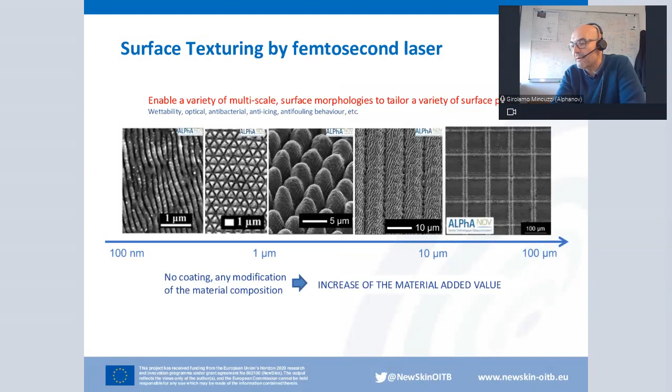In a previous project that has been granted, that we were participating in, named TresClean, we found the way to generate antibacterial surfaces, and we developed this machine that includes a femtosecond laser with very high power, 350 watts, 10 megahertz, and a polygon scanner system that can scan the beam over the surface, and the machine was able to process surfaces as large as more or less 1 square meter.

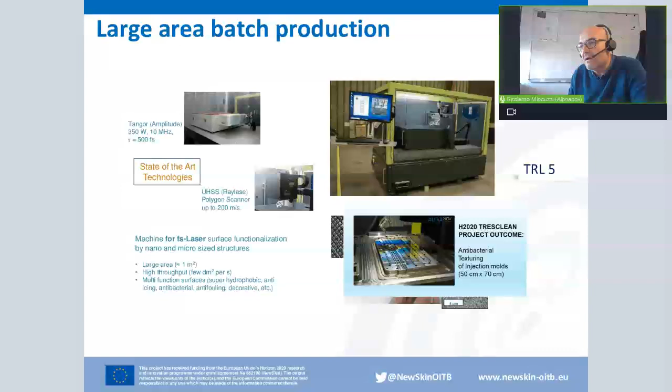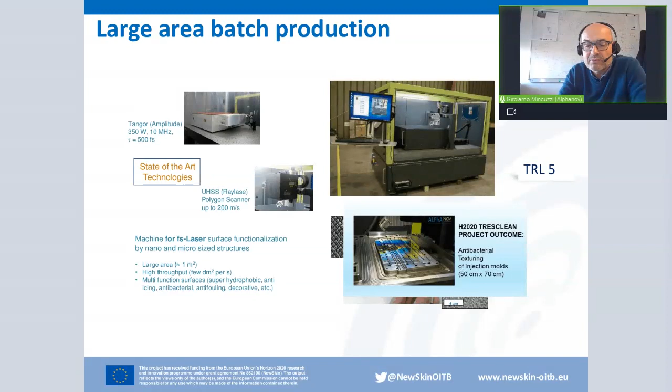The main outcome of the project was the antibacterial texturing of an injection mold that has been used for, let's say, electro appliance applications. But we want to improve, and the target of the project NewSkin for us is really to target mass production.

So to do this, we developed this new machine that you can see here, in which we pass from batch production, so from foil-to-foil production, to a continuous approach through the concept of roll-to-roll processing. So we have the same laser, the same scanner here, but the substrate we process will move under the laser through a roll-to-roll process. I will show you some more details about the machine.

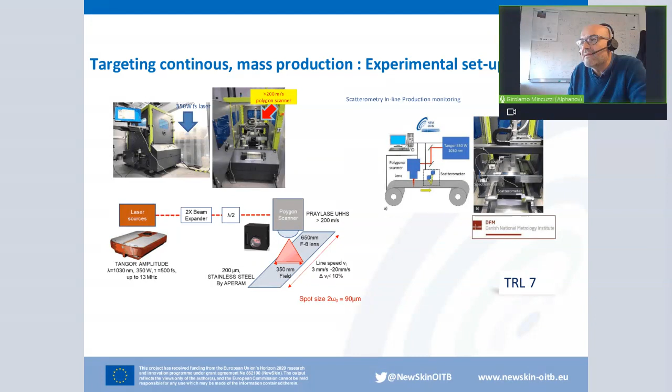The machine includes a system for inline monitoring. The system for inline monitoring is based on diffractometry. So basically, we measure the light diffracted by the regular structures that are generated by laser on the surface, and we compare the spectrum that we obtained with the theoretical spectrum that has been calculated, making a hypothesis on the structures we are generating.

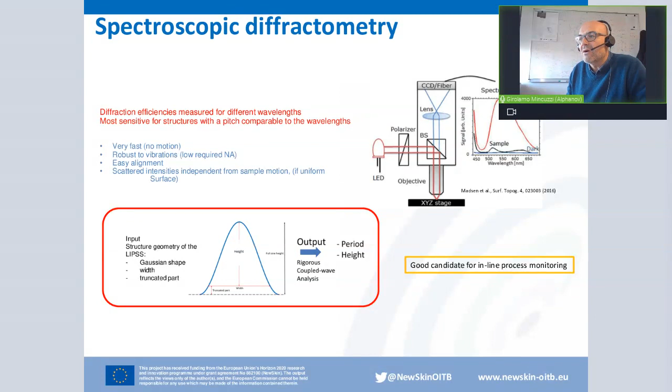So we compare the experimental with the theoretical one, and we choose the one that best fits the experimental results. And this way, we can calculate, for instance, the period and the height of the structure that we have generated on the surface.

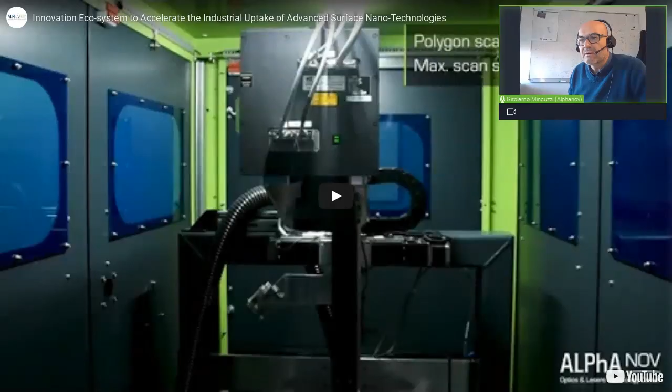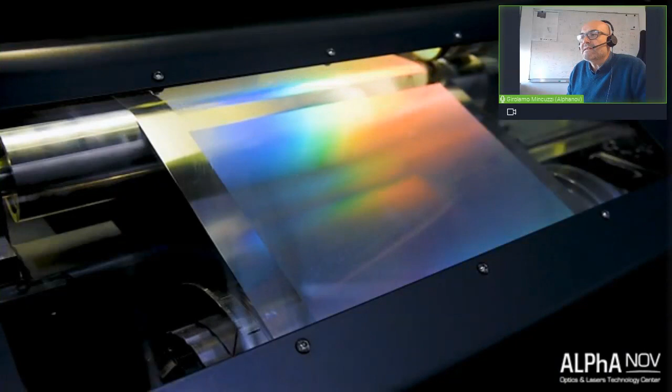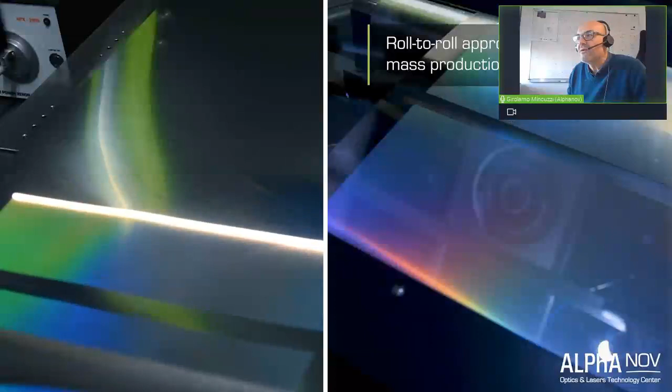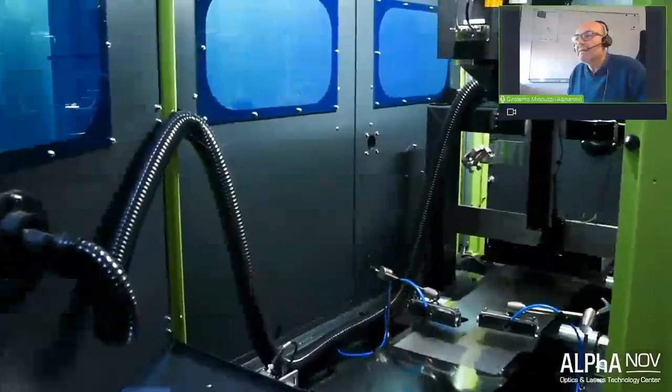Yeah, so here you see the process. The part that has been textured is identified by this dispersive effect, so it's a rainbow color you see. On the left you see the laser, and on the right you see the speed of the process. So it's quite fast. Here you see the laser that we implemented in the machine, and this is the scanner we use, and here you see the inline monitoring system.

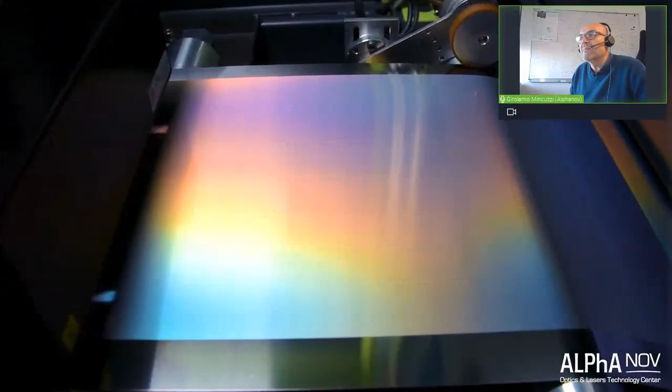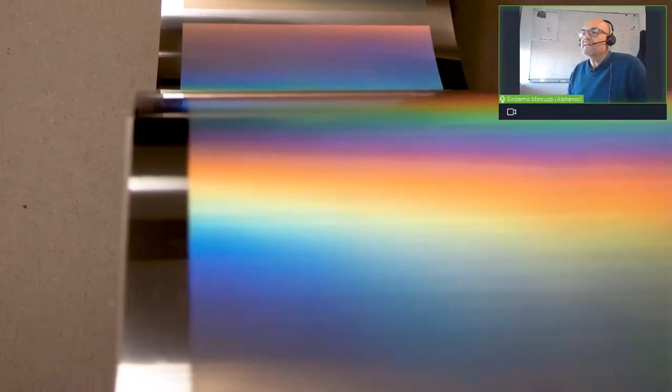So we can reach throughput as high as 5 minutes per square meter, which is very interesting for industrial application. And here you see some of the samples we did. Here are some of my colleagues that participated with me. Yeah. So if I go on, thank you for the video.

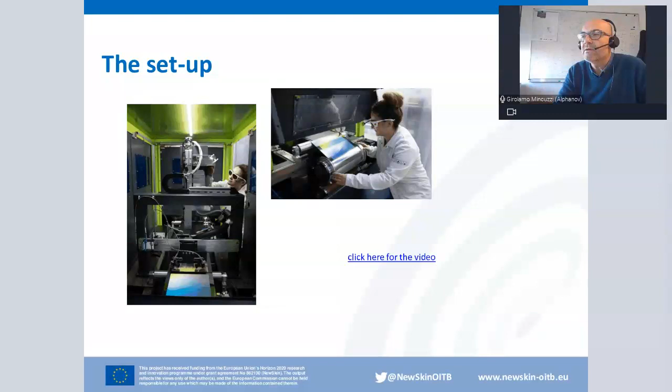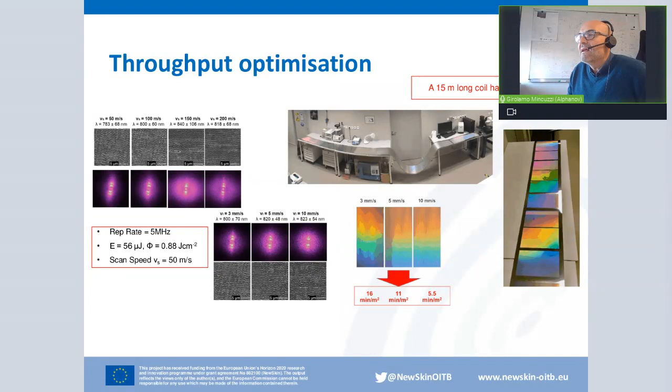Then we fixed the scan speed to 50 meters per second, and we tried to optimize the throughput by increasing the line speed of the coil of material, and we passed from 3 millimeters per second up to 10 millimeters per second, and we found that it's still good at 10 millimeters per second, which corresponds to 5.5 minutes per square meter. Here you see some of the samples. We have been texturing a stainless steel coil that was 15 meters long in nearly 1 hour.

In the meantime, we can measure as well the height, and the height of the structure is around 200-250 nanometers. So the period that I previously showed is around 1 micron, a little bit less; both are consistent with the literature, and it's possible to see if the direction of the structure changes through an analysis of the polarization. I would like to add that given the height of the structure, it's possible to deposit on top of our structures some nano coating to, let's say, enable multifunctional surfaces.

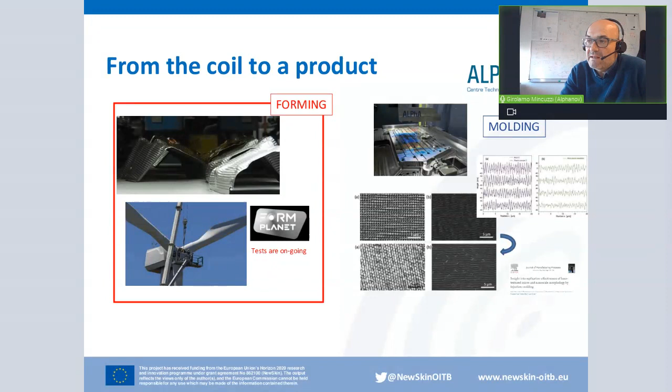So I showed you the machine. I showed you the surface structures we can have. I want to give you highlights on the different properties that can be developed and that are the objects of the value propositions. So if you want to develop one of these properties, for instance, you can apply for the value proposition and we can develop it together.

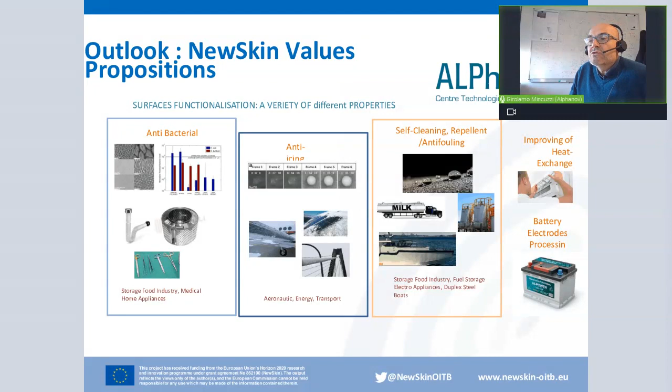So the first is antibacterial. We observed that the structures we are able to generate reduce the proliferation of bacteria on the surface. We evaluated a factor of 10 to the power 3, so a factor of 1000, which is very important. So textured surfaces reduce the proliferation of bacteria by a factor of 1000.

Another interesting property, which could be good for several applications like aeronautics, energy, or transport, is the generation of surfaces which show anti-icing properties. So we can generate on the surface some specific structures, and the resulting surfaces can show anti-icing behavior, or we can improve the anti-fouling behavior of the surface. This is for storage, the food industry, fuel storage, electro appliances, or boat fabrication.

And finally, I will cite as well improving heat exchange, or we can process battery electrodes, both, let's say, current collectors or active parts.

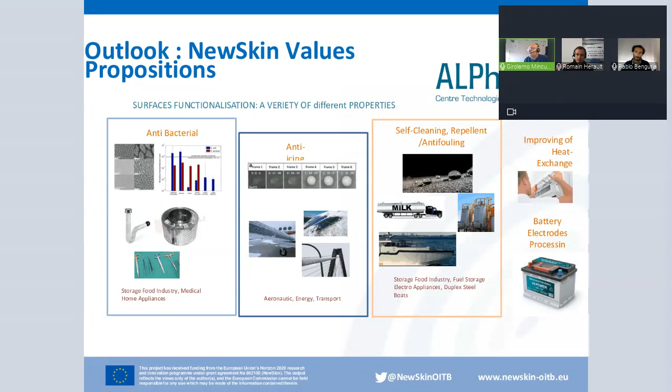Yes, let's say that for the moment we can process metals, first of all. Let's say coils of metal which are not thick, around 200 microns, more or less. This is because the machine can process only material which is not too thick, in particular for metal. Otherwise, it will not be able to do the roll-to-roll processing. But we can try with polymers as well. This could be another option.

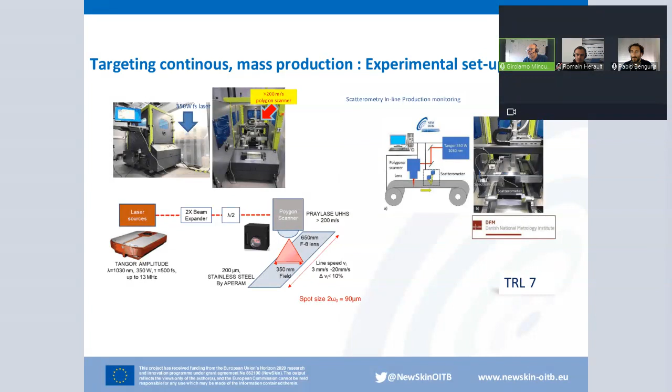For instance, the coil that you have seen in the video is stainless steel. The width is 35 centimeters, and the thickness is 200 microns. So these kinds of materials are largely compatible with the machine that we have up to now. So really, we can make a kind of proof of concept and show the potential of the process. But if you are targeting material which is much thicker, then you have to develop the machine for your industry yourself, let's say.

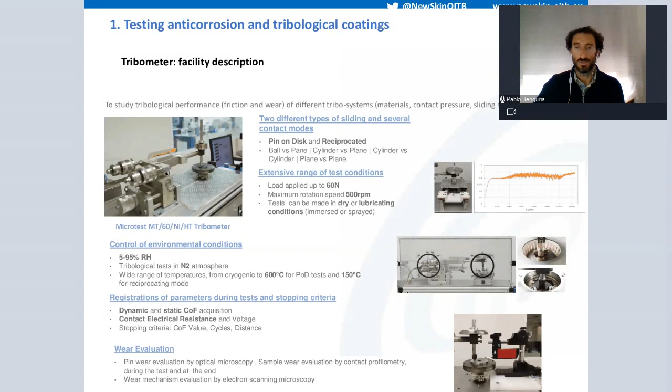In the next slide, I will show you very briefly an example of a selection of substrates that we performed in a private project. We had a given surface coating that has to work in a harmonic drive gear for the aeronautic industry, and they wanted to select which steel substrate would better withstand the conditions during working. So we selected the best conditions, and we achieved an improvement from hundreds of operations to more than 17,000 operations, by applying the lubricant and selecting the best substrate.

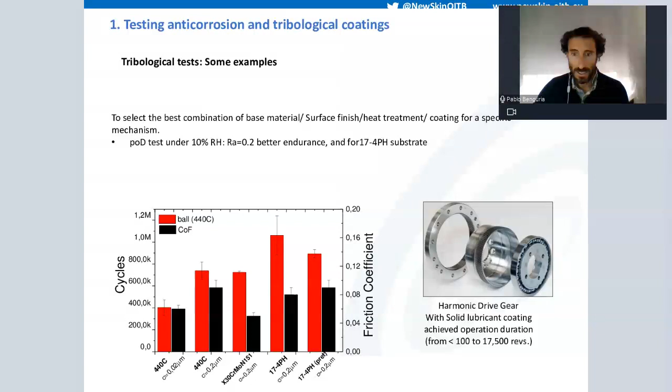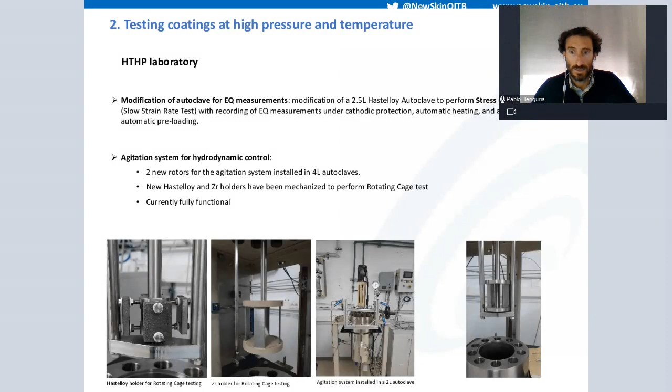Okay, next one is testing coatings at high pressure and temperature. Here we have an autoclave laboratory where we can work under very high temperatures and very high pressures. Here we select as well the conditions and the media that happen in real life. We modified a couple of autoclaves in the project for electrochemical measurements and for the implementation of an agitation system for hydrodynamic control. That way we can perform rotating cage testing, which is quite demanded by our customers. Here you have some pictures of the holders, and here are the samples that are rotating. This was supposed to be a video, but it cannot be played right now. It can be seen how the samples are rotating and then are introduced in the autoclave. And then when it's closed, we can test the conditions that we have defined.

Okay, next one is an example, the same as before. We had to select between two materials, P110 and L80, in a distilled water media under a temperature of 70 degrees and a high pressure of 220 bars, with agitation during almost 500 hours. We performed the testing, and we observed that the general corrosion rate and the localized corrosion were quite higher in the first of the materials. So we concluded that the second material withstands much better the conditions that the customer needed.

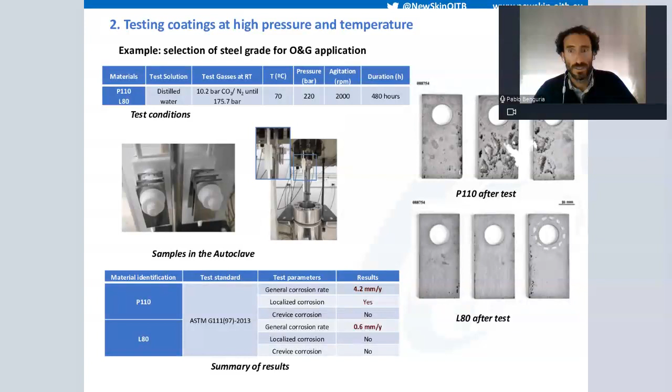Okay, the last one is testing anti-corrosion and anti-fouling solutions in real offshore conditions. Here we have the HarshLab. It is the first offshore floating laboratory for the evaluation of materials and components in a real offshore environment. This is quite new. We had been testing a previous version of HarshLab for 3 years now, as I will explain later.

Now this is the second version, which is in the port of Bilbao right now, but will be carried to the BiMEP area in the following weeks. This is the place where the first version had been for 3 years, and where this second one will be moved in the next few weeks. It's an experimental area in front of the Basque Coast in Armintza.

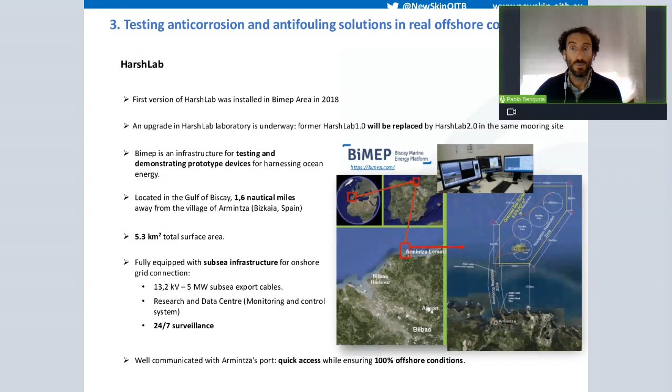It's quite interesting. It was designed for testing and demonstrating prototype devices for energy harvesting. However, the facilities were ideal for us for placing our HarshLab there, because it has surveillance and is quite close to the port, while being absolutely open to the storms and swells coming from the northwest in the Atlantic. And we also have a submarine cable that can provide electric power to the laboratory.

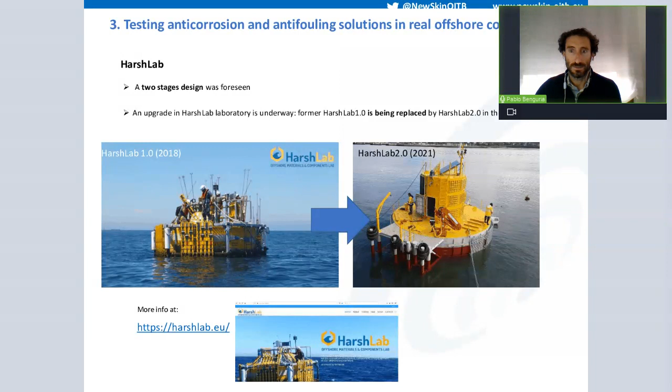So, as I said, we designed it in two stages. The first one was moored back in 2018 and was retired in September this year. And it will be substituted by this HarshLab 2.0, as we call it, that will be moored next week. Here you have the website where more information is available.

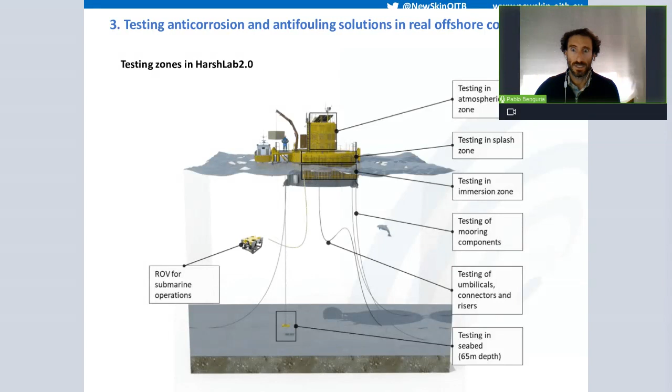Here you can see in a diagram the different testing zones. We can perform testing in the atmospheric zone, in the upper part of the structure, in the splash zone, on the deck, and in the immersion zone below the water line. We can even perform testing on the seabed. It's about 65 meters depth, and we can also test umbilicals, connectors, risers, mooring components, whatever you can imagine, even sensors or communication devices.

Here are some examples of the developments that can be tested and validated in HarshLab. Corrosion testing is quite evident. We have measured the corrosion rate for all the zones in the HarshLab. It's about CX for the atmospheric zone and Im2 for the immersion. Antifouling solutions are quite evident also. We can test here any kind of antifouling coatings that have been developed by the industry and test how they work in a real offshore environment.

Aging testing sometimes is not about corrosion or antifouling, but about aesthetic properties or flexibility or whatever, which can be tested here as well. The validation of riser connectors and umbilicals is quite relevant. We have two available holes to test any kind of riser or connectors that can be attached here. Offshore communication systems, not so much over the water surface, but below it, which still has some room for improvement. And even testing equipment in service, both on the deck or indoors as well.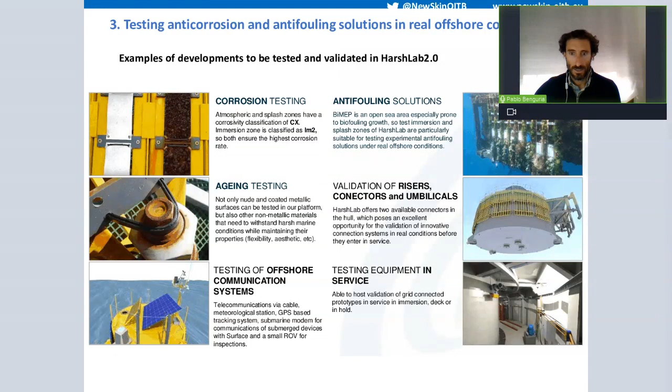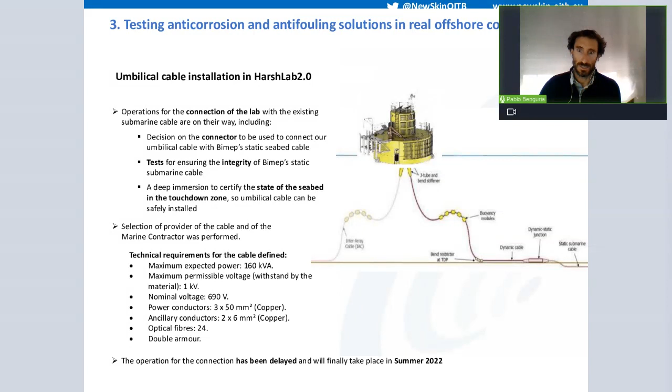Okay, in the NewSkin project, we will connect this HarshLab via umbilical cable to the submarine cable that is already on the seabed in the BiMEP area. We have already defined and designed the cable and the requirements that we need, and we will connect this cable to the HarshLab by the summer next year. So there will be some months, from commissioning in the following weeks till the summer, when it will not be connected to the grid. But this is the improvement that will be made in the project.

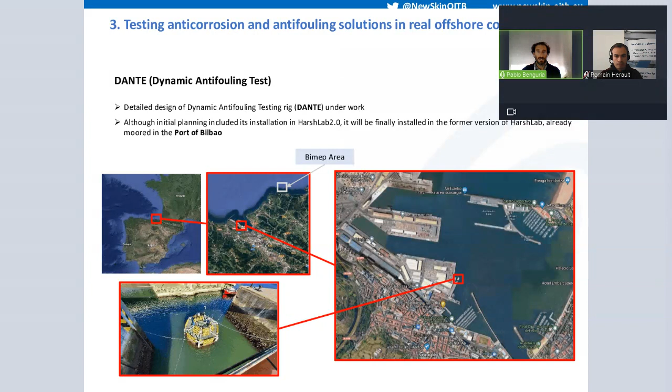And what happened to the first version of HarshLab? Well, we moored it in the port of Bilbao, as you can see here, and we will install here a DANTE, as we call it. It's a dynamic antifouling testing rig that can test antifouling solutions under dynamic conditions according to the ASTM 4939 standard. It is quite relevant because it tries to simulate the movement of a vessel with speeds up to 15 knots. We have designed it for hosting about 120 probes.

The standard establishes that it has to be 30 days in movement and then another 30 days static, and then about 1 year. It will be fully functional by the beginning of next year. It depends on some devices that have to come to Tecnalia.

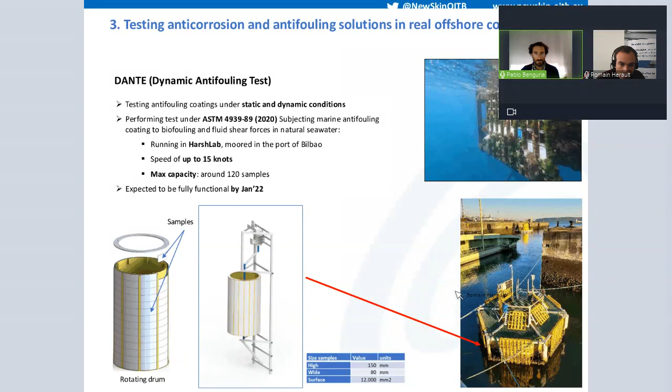So we have one question from Diego Alfonso Amaya Rojas. So in case of coating substitutions, will it be possible to test the current coating and the new one, or is there a reference scale for adhesion to the surfaces? Is it referring to the HarshLab, or to the tribometer, or to corrosion? To corrosion, to the HarshLab. Yeah, we can test any kind of coatings. I don't think I understand the question. Sorry.

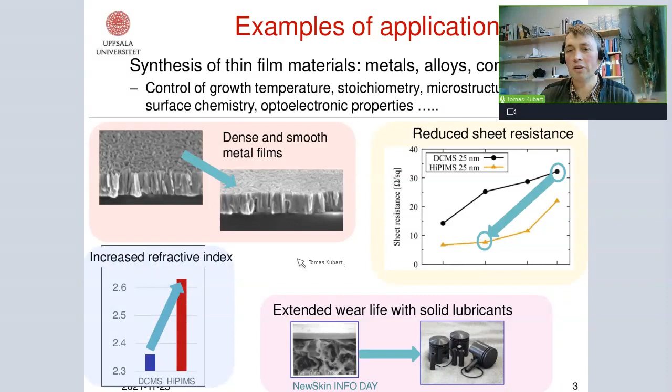So to begin with, hopefully many in the audience have already heard about magnetron sputtering, one of the most commonly used physical vapor deposition techniques to coat surfaces. It's really useful, it's widely used, and it can be scaled up. So that's one of the main advantages. It's fairly flexible, and there are machines that can coat substrates that are 3 times 6 meters. So it's a real industry process.

However, as an example, I'm showing a typical titanium nitride thin film. And as you can see, typical thin films or coatings are columnar, which is not always bad, but sometimes the existing coating is simply not good enough. And what we do here in Uppsala and what we offer in the NewSkin project is modified magnetron sputtering, where a large part of the material being deposited is no longer neutral atoms, but rather ions. And because we are using ions, we can provide more energy to the growing film, and we can make it denser and in general better.

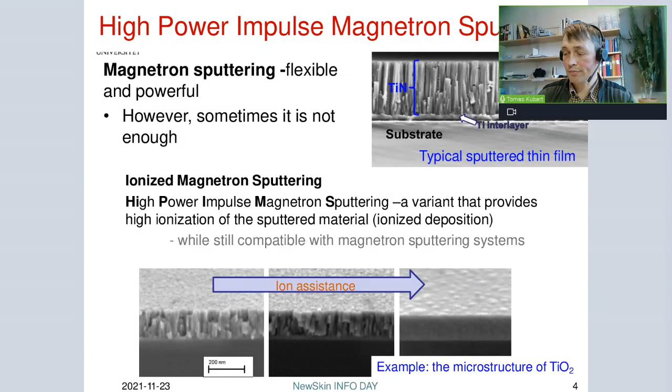And here is an example of, for instance, a titanium oxide thin film, where by changing the growth conditions, we can go from a columnar to a very dense and featureless microstructure. And this is very useful in many cases. I will not talk about the technology as such. I will just mention that this technology is still compatible with magnetron sputtering. So if you know magnetron sputtering, you can do high power impulse magnetron sputtering too. It's just that the way the plasma or discharge is created is different, but otherwise the hardware is compatible, or it's the same.

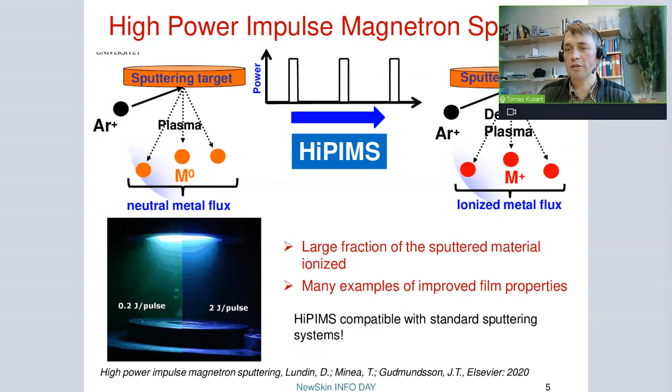Rather, what can the NewSkin project offer to you?

I've mentioned surface engineering and coatings, and in this project we can start from a lab scale. For those of you who don't have a specific material or product, we can help on a lab scale to identify suitable surface coatings and do some testing. And then we can also do such coatings on a large scale.

It's also possible to use this HiPIMS technology on metal strips and sheets through Fraunhofer Institute, and they have machines that are for fairly thick substrates or rolls. And there is also Tecnalia.

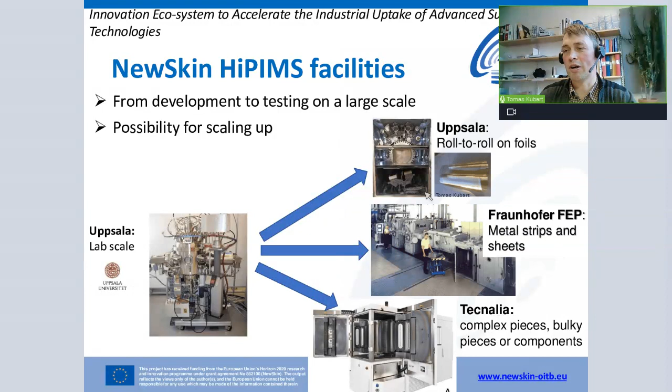Pablo actually mentioned some of the testing facilities, but there is also a coating facility, Tecnalia, for complex pieces and large components. So depending on where you are in the product development, NewSkin can offer everything from a small pre-study or feasibility study on a lab scale to real semi-industrial production scale.

That was about the machines and technology. Now I thought I'd briefly go through a few examples just to give you a taste of what can be done. But I have to stress at this point already that what we are talking about is more a technology.

So if I am showing a titanium oxide coating, that does not mean that we have to stick to titanium oxide. We can use this technology to make aluminum oxide or other materials too. This is really rather an example for you to get interested and then ask, well, can we do this? Can we do that? And then it would be very good to have a more focused discussion.

I start from an example of a coating developed by Tecnalia, solid lubricants or self-lubricating coatings that can provide surfaces with very low friction. Just some examples of the components - the advantage of solid lubricants is, as you may know, that these surfaces satisfy low friction even in the absence of lubricants. So they can increase the lifetime, reduce friction, and also prevent damage in case there is loss of oil or lubrication.

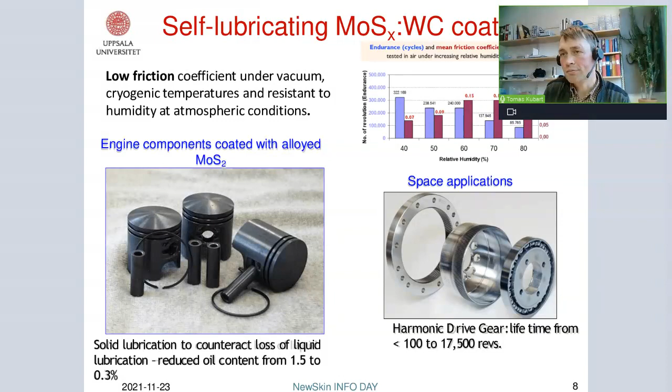Our technology is useful also for optical materials. Here I'm showing one example of titanium oxide, which is of course an interesting material for optics, where by increasing density of the deposited coating, we can increase the refractive index.

So in this case, it was like from 2.4 to 2.6 when the ionized deposition process was utilized. Again, the way this works is simply when we are getting a more dense structure, then we are getting closer to the bulk properties of the material in question.

There are of course different requirements on the coating material. So if the density and smooth surface is desired, then we have ways to tune the deposition process. In some cases, there might be some other requirements, and then maybe we modify the deposition process in a different way.

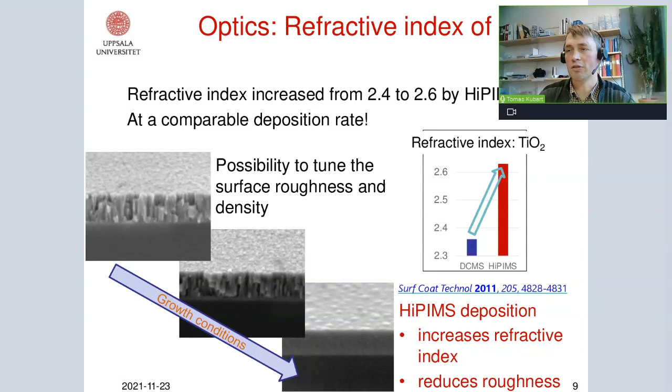There is one more example, and this one is from microelectronics. We also tested our technology for metallization, and in this case, it was very thin conductive films of cobalt on silicon oxide, and we could see that we could improve a lot the resistivity of our very thin films. So at a thickness of about 20 nanometers, we could reduce the resistivity by about an order of magnitude.

There is a bit of illustration showing the microstructure, so we can increase the grain size and this way improve the conductivity. But I should point out that right now we are, for instance, exploring this approach for conductive corrosion resistant contacts. In fuel cells, for example, there are requirements for very good electrical conductivity and corrosion resistance. And then of course, this is the way to go, to make a dense and conductive material that will also resist corrosion.

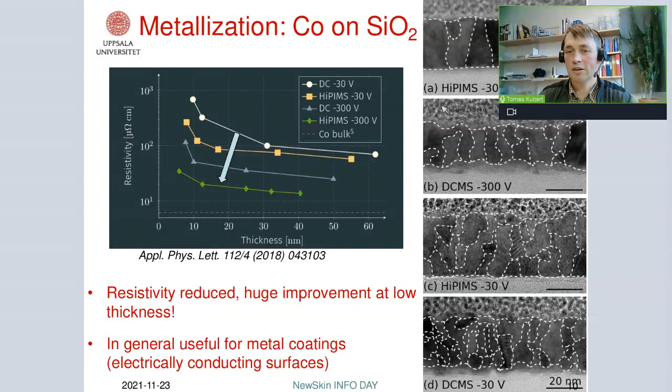I'm slowly running out of time, so I will conclude with my last example, again a different topic. At some point, it's interesting to combine surface structuring and surface coatings. This is an example of a nanostructured surface, a moth-eye nanostructure that's imprinted in a polymer material.

Of course, such nanostructures are wonderful. They have really great properties, but they are mechanically not very strong. So here we've shown that if we coat such a surface with a thin layer of titanium oxide, we can improve both the thermal stability and also mechanical properties of the surface. And because titanium oxide is also photocatalytic, we could even make the surface super hydrophilic after UV illumination.

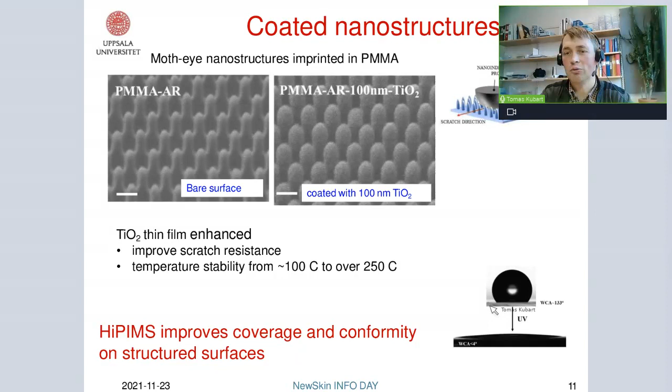So that was very briefly an introduction of the PVD deposition facilities or HiPIMS facilities from the NewSkin project. And just to summarize, HiPIMS, or high power impulse magnetron sputtering, it's a very useful alternative for those who are already dealing with coatings.

But I also need to point out that it's not like a completely different technology. What we always do is evaluate the performance of the coated system against standard sputtering, because there are cases when just adding a coating to a surface will improve the properties and the performance will be good enough. So then there is always a question of what exact performance or properties are desired.

But anyway, through NewSkin, we offer a set of upscaling facilities to really test different ideas on a larger scale. We also have the know-how to help with the product and process development. Thank you very much, and I would be happy to answer questions if there are any.

Thanks a lot, Tomas. I don't see any now in the chat, but I have one, and it's more like a question to confirm something you mentioned. You explained that you can combine surface texturations with the use of HiPIMS. Does it mean that, for instance, we could use Alphanov technologies for a client and combine it with HiPIMS to have the double effects or many effects expected on the surfaces?

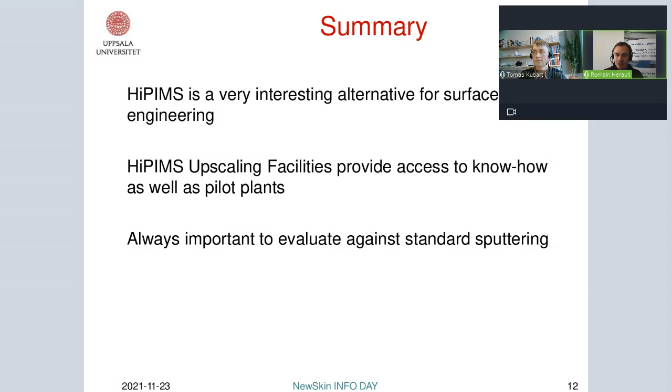So at the end of this webinar, you understand that we can offer several types of technologies, and you can also combine these technologies for a specific project. So for instance, you can use the laser texturation offer from Alphanov and other RTOs who are developing laser technologies within NewSkin. You can use HiPIMS technology from Uppsala, Fraunhofer, and Tecnalia.

So it's interesting for RTOs, for end users such as SMEs, large enterprises, and for researchers to join the platform in order to monitor technological development in this project. Also, on the NewSkin platform, you will have the opportunity to network with the NewSkin partners and to increase the visibility of your own company, because once you have created your user profile, you can create your organization profile, and this is a means for you to advertise your projects, products, and services.